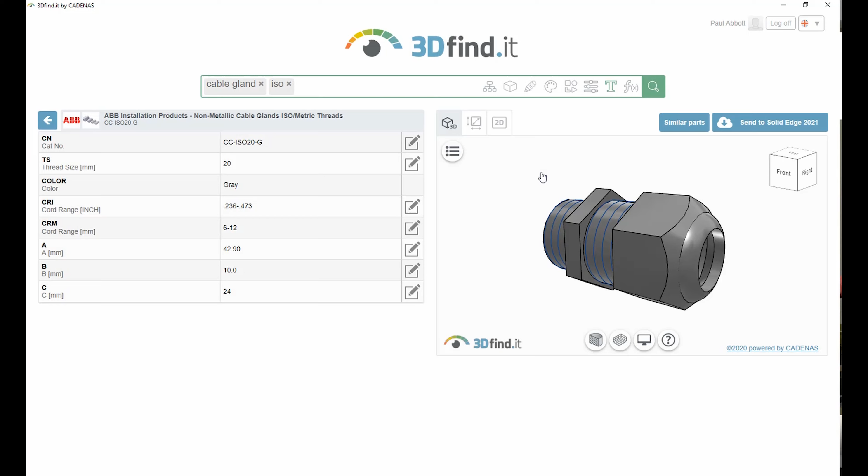Searches can be performed using classifications, geometry, filters, sketches, and much more. Here we are searching for a 20mm cable gland using text alone. We can narrow down the search by filtering different suppliers, or even add an additional search term to look at a particular standard. We can visualize the 3D model for the part, or even the 2D drawing.

Individual parameters for the part can be defined. The 3D models can be sectioned, and users can even search for similarly shaped parts. Parts may also be compared.

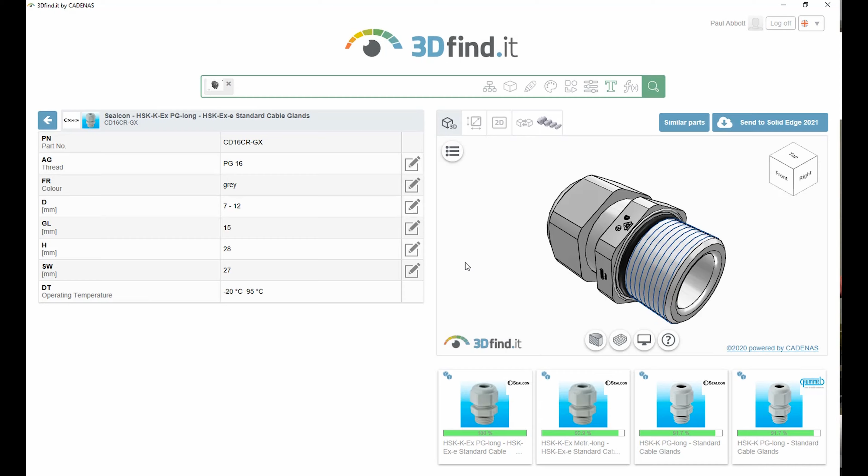A compare function graphically illustrates the difference between the last two parts found. This allows users to ensure they have exactly the part they need, or to choose another part to compare if necessary. Once the desired part is located, a single click adds it to a Solid Edge assembly, allowing us to assemble it where required. Next, we need a blanking grommet.

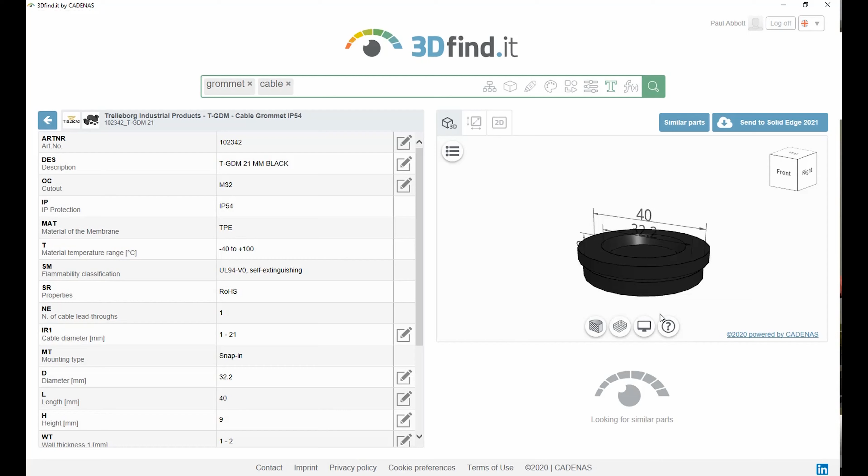This can be selected and placed in the same way. We launch 3D Find It, run a text search, find the part we need, and define the appropriate parameters. In this case, the diameter.

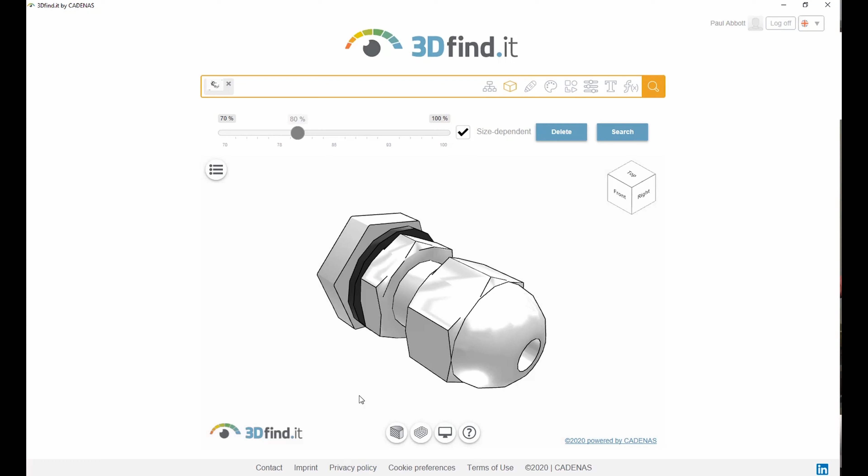The next cable gland needs to clamp a 3mm cable. In order to find an appropriate matching gland, 3D Find It allows us to use an existing 3D model to perform a shape search. In this instance, once the appropriate file is selected, the size-dependent slider allows the search scope to be defined before running the search.

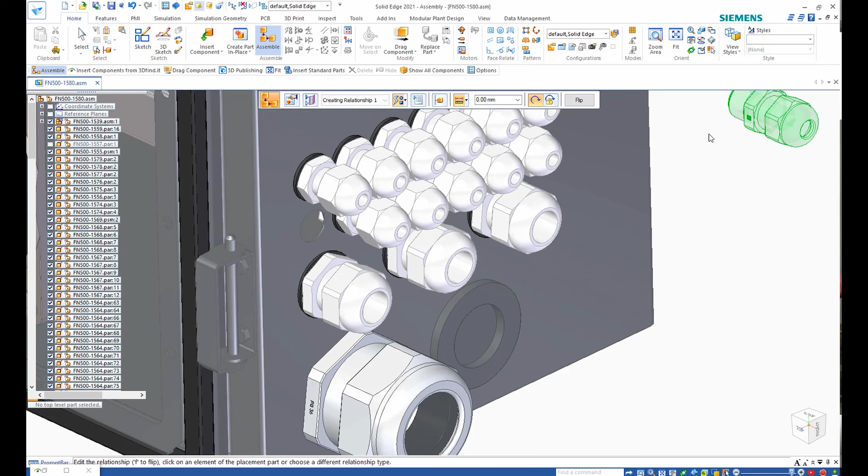We could also narrow the search down by adding other search terms. Once the desired part has been found, the parameters can be defined and the part added to our assembly. Relationships are added in the normal way.

We now need to find a handle for the top of the case. Going back to 3D Find It, we'll do an initial search for the text term handle. This returns many results, so we need to narrow this down by providing a sketch and simply drawing the shape of the handle we need. Once we have located the appropriate handle, we can define its parameters and add it to our assembly.

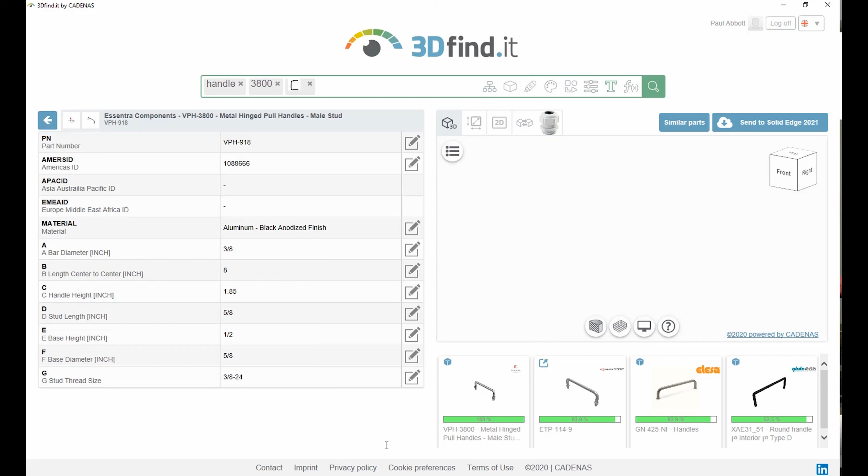The CADENAS 3D Find It search engine provides access to millions of 3D CAD models in native Solid Edge formats from more than 800 manufacturers, increasing your efficiency in finding the parts you need for your design. To learn more about Solid Edge, visit solidedge.siemens.com.